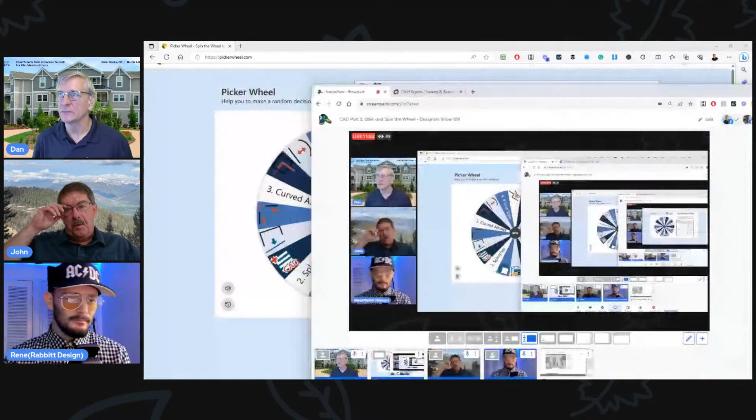We've got some fun topics on here. All right, so that's a simple one, you guys all know what that one is. That is make block. Okay, so actually we'll cover two icons, that one and this one. Oh, and I forgot to hit remove, that's okay. So let me go to Chief here.

Make block: whenever you're drawing things in Chief—lines, windows, doors, whatever—and you want to group things together, you take a bunch of lines and group them together. There's a little icon down here called make block, and that icon is used to group things together. When you do that, you get another icon when you click on it.

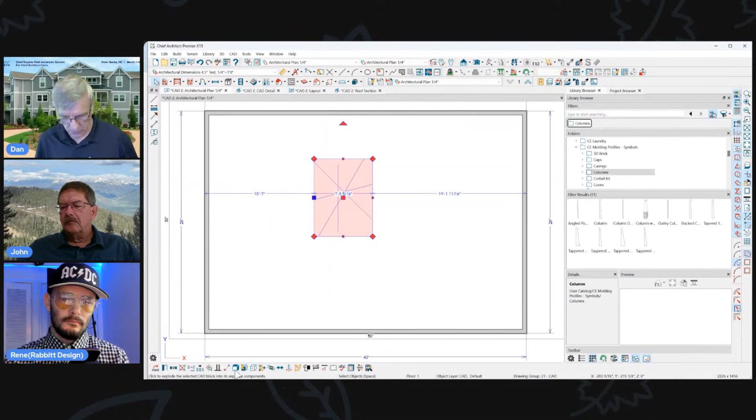That's explode block, which is also on the wheel, so if we land on that we won't do that one. That's the way you can take the block apart so it's individual items again. In its simplest sense, that's what making a group and exploding a group is—you ungroup it.

The thing about all of this is when you explode a group in Chief and go to the CAD pull-down and then CAD block management, you'll notice that even after you've exploded it, it's still in the program, still there. You can still grab that CAD block. I do that every time—I don't hit the insert button, I hit OK. So we hit insert, and now I can insert that block into my plan. Yeah, and so those blocks are always there.

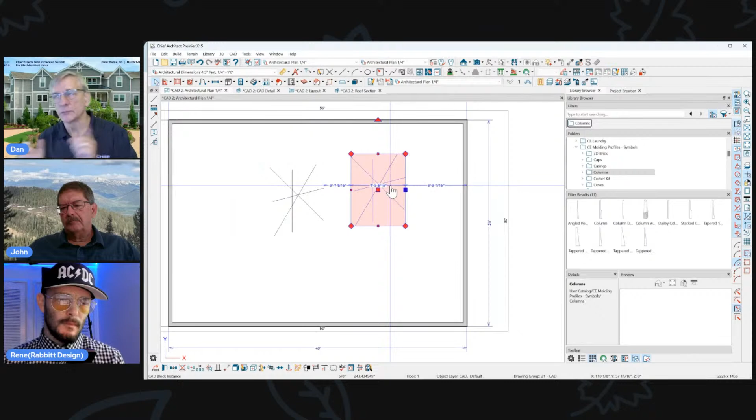There's another CAD block tool, I'll show you some other things you can do with CAD blocks once you get to it. But that's what CAD blocks are—everything that you group together is a CAD block. And you can do the same with windows and doors.

If you put a couple windows in and group select them, you see kind of the same icon, but this one looks a little different, and it's called mull. It's used to mull doors and windows, but it's the same concept where you can group and ungroup items. You could do that with just about anything in Chief Architect—I think the only things you can't really group together are walls, and notes, you can't group notes together. And you can't group windows that are in two separate walls, which makes sense.

But other than that, you could group a lot of things together in Chief. So that's the make block icon. You guys got anything else? Have you ever gone through the really convoluted process of doing a custom sink cutout for a fixture?

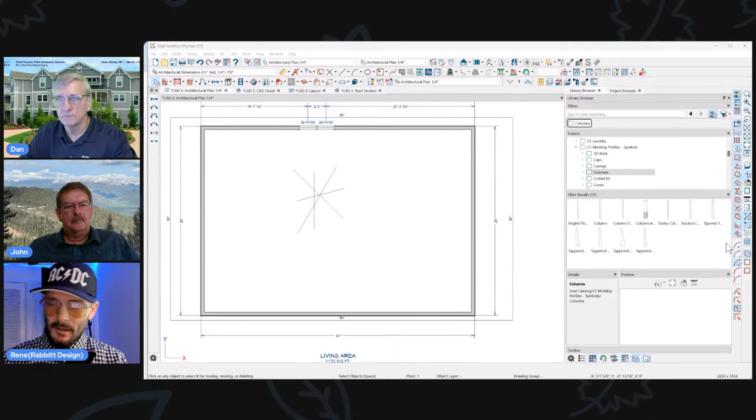I have not. You have to build out a countertop, make your hole in the countertop, and then retain the hole, and then block it with the rest of whatever your sink is in order for it to cut according to your spec. So if you're always building a sink with a faucet and you don't want it to cut around the faucet too, you have to do that process.

Okay. Yeah, different kind of grouping, but the same concept. All right, cool. Same thing where once you make the CAD block, you go back to the symbol and you go look up through your CAD blocks and you find that custom sink one that you made. Got it.

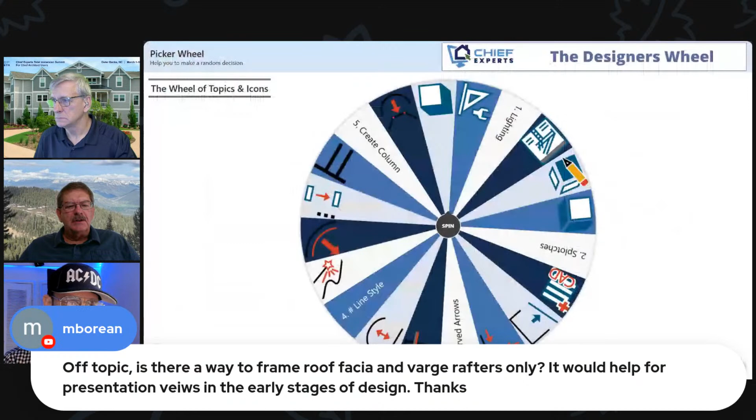Before we spin the wheel again, do you guys understand what this question's about? It's a way to frame roof fascia or barge rafters only. It would help for presentation views in early stages of design. It's a way to frame roof fascia. I don't get what you mean, frame roof fascia. You can do a backer on the fascia. That's part of the roof settings. It would help for early stages of design.

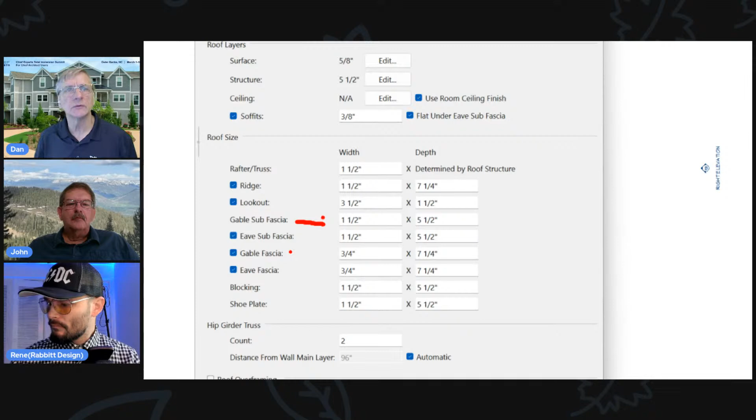I mean, when you're talking about framing, let me just build a roof here quick. When you talk about framing in a plan, it's really easy to frame your plan now and show what's there, again, for those early stages. So when you're talking about the roof setup and the structure for the roof, this is where you would set up your framing for the subfascia, and the gable subfascia, I believe. Yeah, even gable subfascia. So that's where you would set up the framing for that.

And then when you frame your plan, I'll switch to my framing setup here. There's an icon now under the framing tools to build all framing. This one right here. So you click this little icon, build all framing. That'll pop all the framing in your plan at once, and then you can look at your framing all at once. And if you've selected truss roofs, Chief will put truss roofs in your plan for you automatically. So that's pretty cool how that works too. But you'll see there's your gable fascia. I hope that's answering that question.

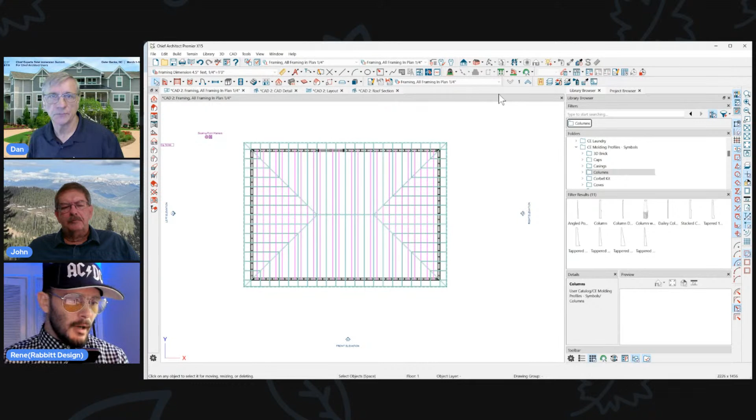And then you could delete the rafters as you needed to. Let's see, if we highlighted the rafter tool and just draw a marquee over that, you just get rafters only. So just don't delete that, and that would leave that info. Let's get back to this. So I could delete it from this view too. Just click on them and delete them. So there you go. You can see you have a lot of control over that. Okay, I hope that helps.

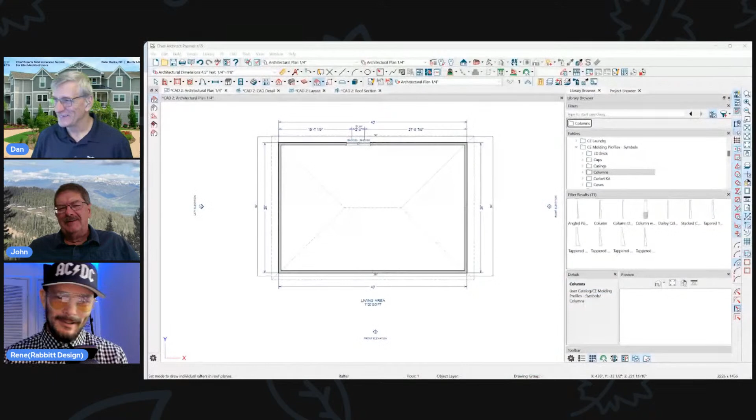All right, let's go back and spin the wheel again. Let me just do something here before I do that. Let me delete this because we already covered that. Here's a clarification of that question. I just wanted to frame the fascia only, not all the interior rafters. This would be so that the camera view looks better. Would save me the hassle of deleting all the rafters or trusses.

Just turn off your automatic framing, and then it won't frame that stuff. Also, super fast to delete all your rafters and rebuild them. Yeah, just like I showed you. Just highlight the rafter icon, draw a marquee, done. Just don't include the soffit or the fascia framing. Yeah, I just have my automatic framing turned off. I don't frame it until I'm done modeling it.

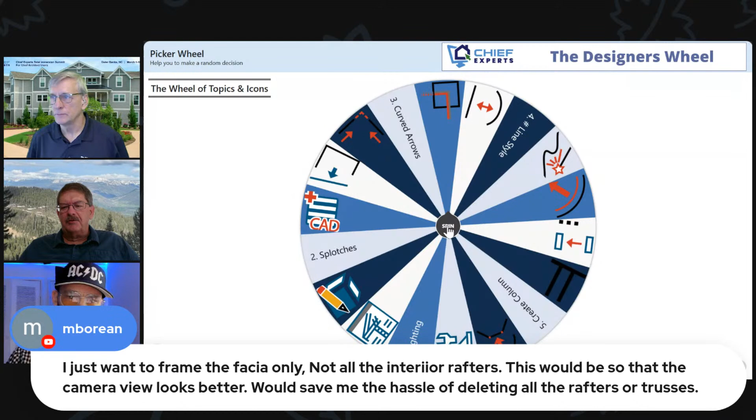And that's the cool thing about group selecting things in Chief. Almost all these icons that you see up here, if you select them and hold your shift key down and marquee select, you're only going to get those items in your marquee selection. So that's a massive time saver.

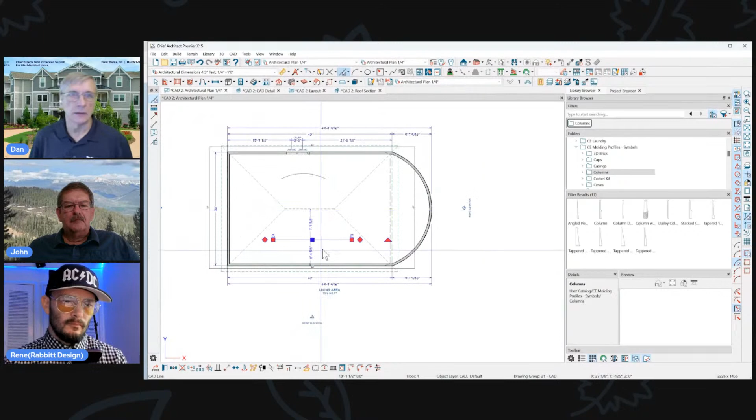Okay. If I wanted to convert this wall to an arc, to a round curved wall, I would draw the wall, make it the size I want, and then set the arc in the dialog for that wall. So it really works well. One of the things I wanted to show real quick, sometimes you want to create arrows that are curved. So a real simple way to do that is to draw a line.

Let me just close my browser here.

So we're going to draw that line. And I'm going to make a line that's kind of like that. There's a couple ways to do this, but I'm going to use the 3 key to add a break in there. Then I'm just going to hit the make line to arc, and I set up a keystroke, Shift D, because I use this a fair amount. So I just hit Shift D and I go like that, and then I go like that, and there's my curved line. And then I could take that, go to my arrows and turn arrows on both ends.

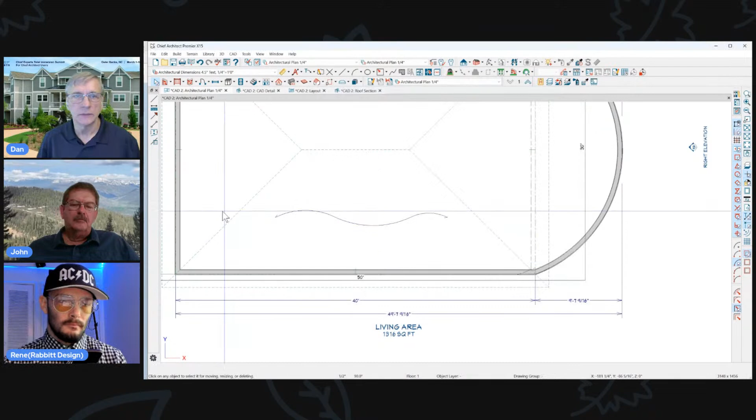And then I could make the arrows bigger, smaller, make them any kind of arrow I want. And there you go. And you can change the size of the arrowheads on that line. It works really well. Another way to do it is to draw your line. You don't need to convert line to an arc. Just grab with your right mouse button and you can bend the line. Add a break in the line, grab it, move it. So right mouse button. That's the other way to make arcs in Chief.

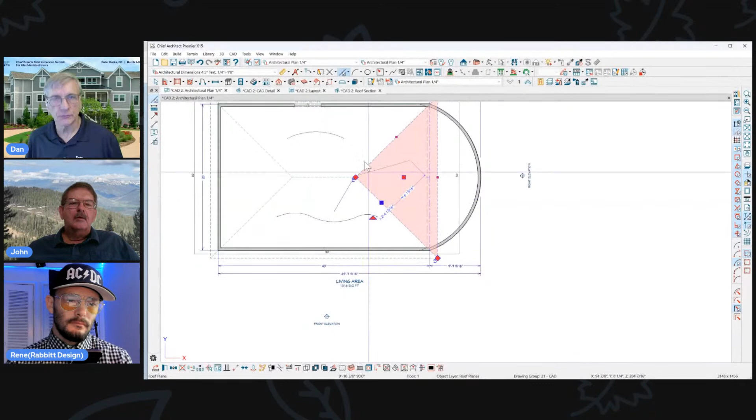And at any time, you can convert that arc back to a line by clicking on the same tool. That makes it a line. Yeah, it's not only convert line, but it's convert selected edge, right? Exactly. I can't do it to roof, so nothing for a roof. But any kind of line, you can do that. Countertops, sidewalks, roads, anything made out of a CAD polyline other than roofs.

So I find it much easier to start with CAD and then convert my CAD shape to what I want, as opposed to starting with the countertop. I'd rather start with CAD because we're not building in 3D. It's not as laggy, you know. Well, whenever I do a kitchen design in Chief, I'm laying out. I use countertops. The reason I use countertops is custom countertops.

I'll just start laying them out, hit my tab key, and I want to make that minus 25. Because I can break them, shape them, make them whatever I want really easily. And the cool thing about it is I can look at it in 3D and get a little sense of the traffic flow. So I can measure off that. And if I like it, I just leave them there and put my cabinets underneath it. So I find that to be a real simple way to start laying out kitchens, to use custom countertops rather than putting all these different cabinets in.

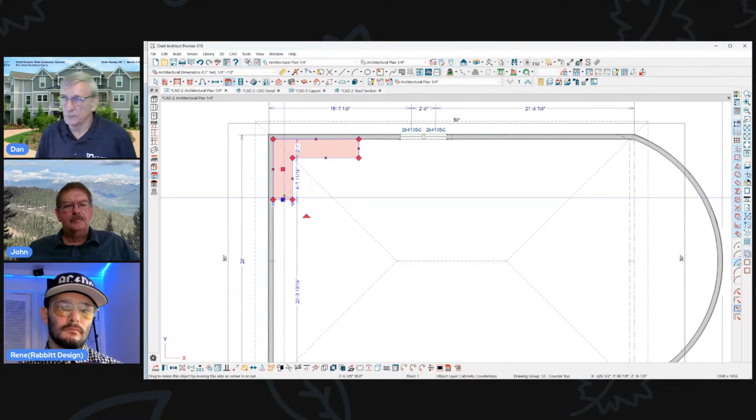Because what's the first thing you do in a kitchen when you're laying it out? You're trying to figure out a good traffic pattern. Then we start working on the appliances, you know. So Rene, you probably have libraries set up full of stoves and different kitchen variations that you just pop in and move the things around. So another nice way to do it.

I'm curious, Dan, with making the line into an arc, like with the connection things for electrical lights to switches and stuff, does it matter which direction you start the line from? Or which way the arc goes? Yep. Yes. Since you told me that once, John, how does that work again? If I go that way, go up.

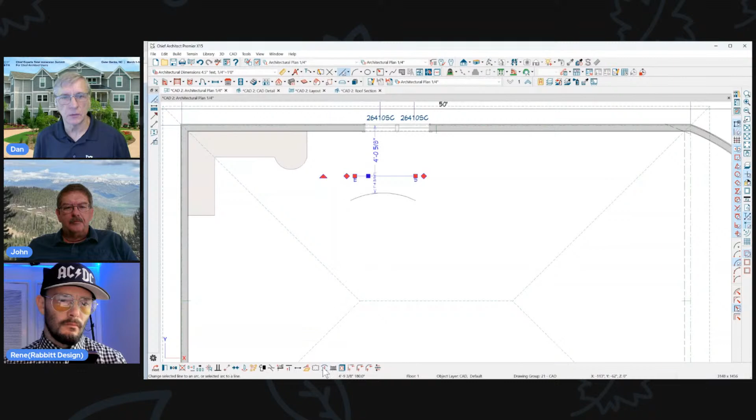When you make the arc, you pull it the other way, it'll go down. So here's my start, end. Here's my start, end. So if I convert those to arcs, you'll see that they'll go. Yep. So that's kind of handy if you can keep that in mind when you're doing stuff. Yeah. So let's see if I go this.

If I go from top down, it's going to put the arc on the right side. If I go bottom up, it's going to put the arc on the left side. Yeah, that's a good little tip. Cool. The electrical connection tool does that too, right? Yep. Oh yeah. That's how we discovered that.

Here's an interesting thing. We've never talked about anything like this: the power of the plus ABC button for changing. Yeah, that gets you quickly to being able to select a line segment and then select a dimension segment and change the leading or trailing text or suppress the dimension. Oh yeah, I use that one once in a while. I know what he's talking about.

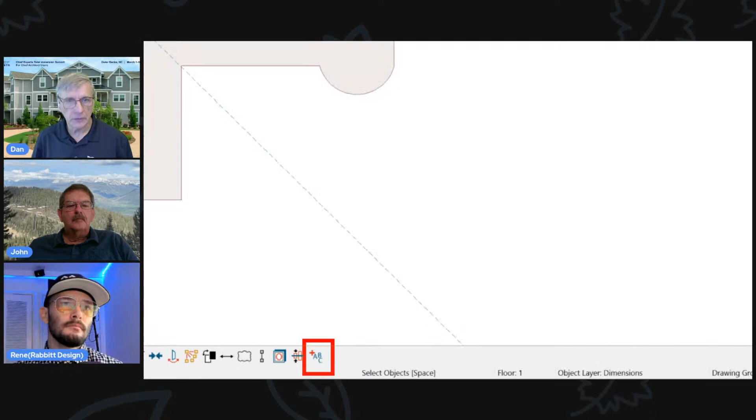So a good use for that might be if you ever dimensioned a bay window or something and you got a fraction, like a 16th of an inch, you just don't want it there. So just click on the dimension and click the plus ABC sign down here at the bottom. Okay. And then like you were saying, let's turn the auto refresh off. And now I can put text to beginning or end.

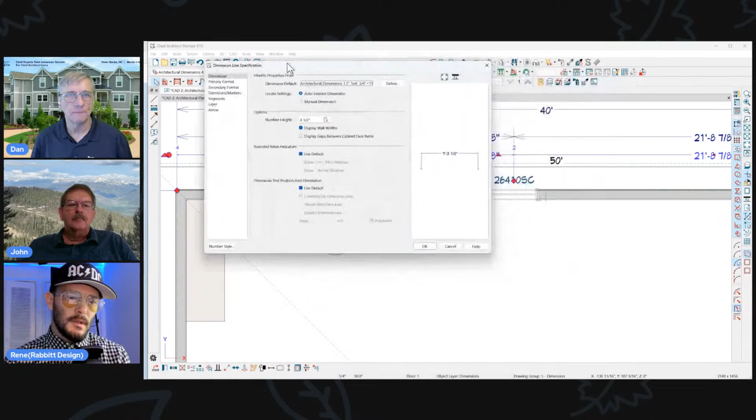Now, this is cool to do that, and then I could suppress the dimension value. So if I just want that to say 15'7" and not the eighth, I just leave one of those off, suppress the dimension. Now I've changed it to 15'7". I guess I had one on top of the automatic dimension. So that's how you can change it. And notice it's listing the segment numbers, and when you use that ABC, if you hover over a different segment, you're affecting that different segment.

Yes. And here it is in the dialog for the window. That button is called segments here. So here's where I typed that in, and here's where I hit suppress dimension value. So you can do a little bit more with it in here. Not much, but a little bit more. So that's kind of cool. And then there is another button somewhere where you can turn it all back to the original if you're done doing that and you want to get your actual dimensions back in. I forget where it's at, and I don't have my Chief open.

How can you be at a show like this without your Chief open? I don't have enough screens. Come on, John. Jeez. It's actually open, but then I'd have to lose everything else. I'm just teasing. All right, let's go back. Spin up the wheel. See what we come up with.

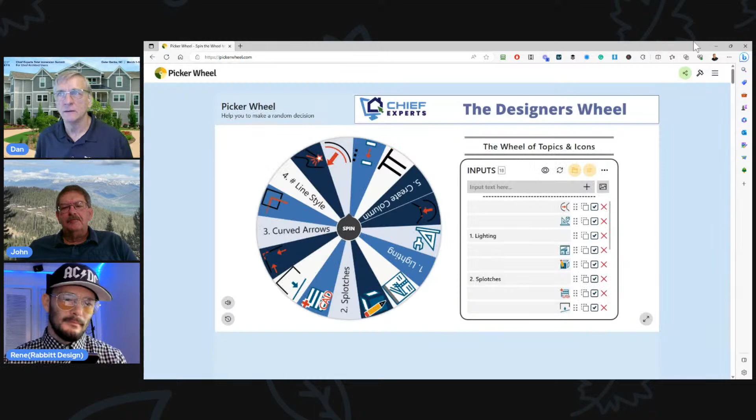All right. Concentric jump. You guys know that one, right? Oh, yeah. So what's the keystroke for concentric jump? Control Alt C or something like that. Control C. I don't know. C. I converted my C to copy because I like to use that more. Oh, yeah, I get that. Well, that overrides it then. Then you don't have concentric jump. No, that's right. I leave my C on there because I use it all the time. I convert the copy to Control C. I get you, John.

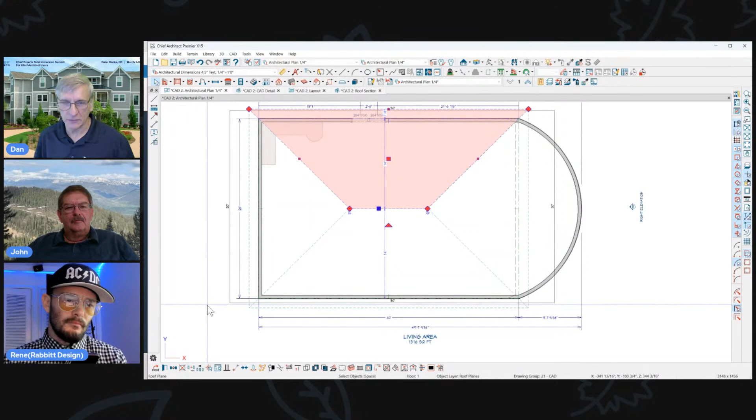We've talked about this before. Chief's copy command, when you hit Control C, doesn't work the way we want it to work to copy and paste things. We'll get to that another time. But let's talk about concentric jump. I'll show you a combination of things that you can use with concentric jump. In fact, I think this is one of the things I had on my wheel, but we'll have some fun with it. So you want to create a column with a base and a cap and a column on top of it. Let's just go create that base.

All right. So just for simplicity's sake, I'm just going to draw a slab, and I want to put a column on the end of that slab. So I'll make this 8 feet from the house. I'm going to draw a box. So I'll draw my slab. I'll click on the corner. I'll click this. I'll hit tab. I'm going to make it 24 by 24. 24 to the right, 24 up. There it is. And I'm going to take that and make that into the base of a column.

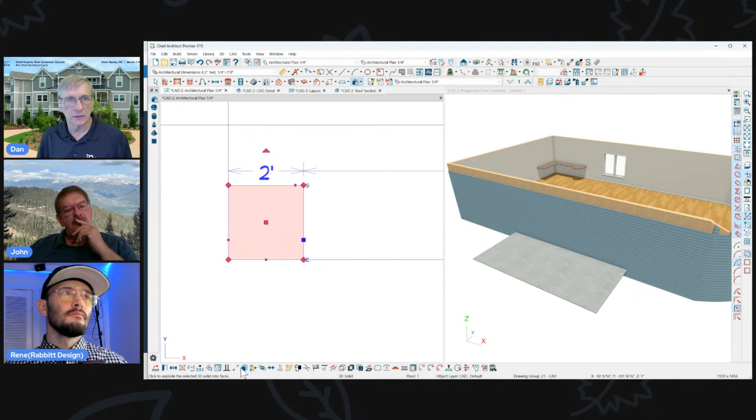And then I'll put a cap on top of it using concentric jump. So we're going to take that, open its dialog, give it a height of 34 inches, and the top of it's going to be at 34 inches. So there's that box right there. Now I want to create a little cap that goes on top of it. So here's where we're going to use concentric jump.

Concentric jump is this tool right here. We see it on the edit toolbar. It's also under the pull down menu, edit. It's up here under edit behaviors, concentric jump. And you'll see the keystrokes here are C or X1.

What is X1? What's the X1 button? I don't know. I never knew what that was. I didn't either. That'd be new info for me. A controller button, maybe? If you're using an Xbox controller. Maybe. I don't know. We'll figure that out someday.

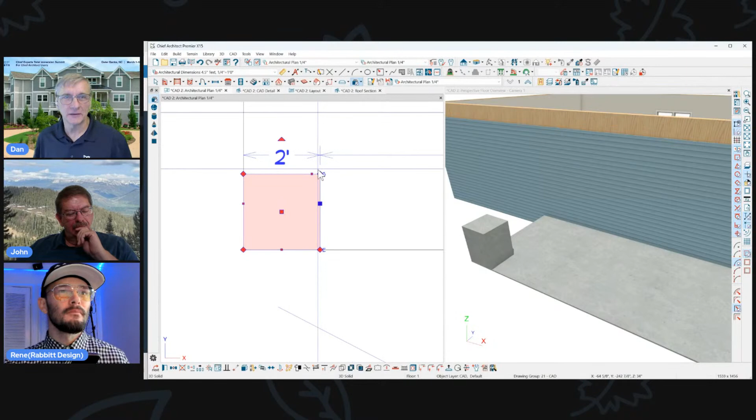But I want to make a top for this now. So here's the combination of keystrokes that you're going to use. I'm going to hit copy. Then I'm going to hit paste hold position right away. I'm going to paste that copy right where it sits right now. So now I'm working on the copy. So now I'm going to hit my C key, see how it jumps out equally on all sides?

That's your concentric jump. And then I'm going to hit tab, and I'm going to jump it out 1.5 inches. I just want a little 1.5 inch lip. You don't have to put the same number in both of these. I think whatever the one you type in first is the one that does it. And there we go. So now I've got a 1.5 inch lip that I've created. Let's just double check that.

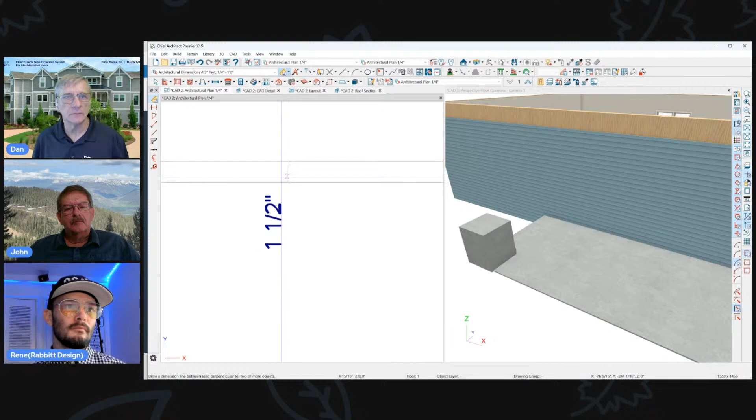Yep, there it is. And now the last thing I have to do is set the bottom. Let's make this 2 inches tall. And I'm going to set the bottom of this at 34 inches on top of that other box. And there's my lip now. So that's a simple use of concentric jump to create something like that. Really a simple, slick way to do things like that.

Let's say you put a countertop in, but you need to make it a little bigger all the way around. Just concentric jump. Again, I could click on the icon here and double click on it. There's so many uses for this. Doing your lot setbacks for your properties, doing a pool deck. I use it a lot. But let's say I want to jump that countertop out 1.5 inches. I'm going to set 1.5 as my jump amount.

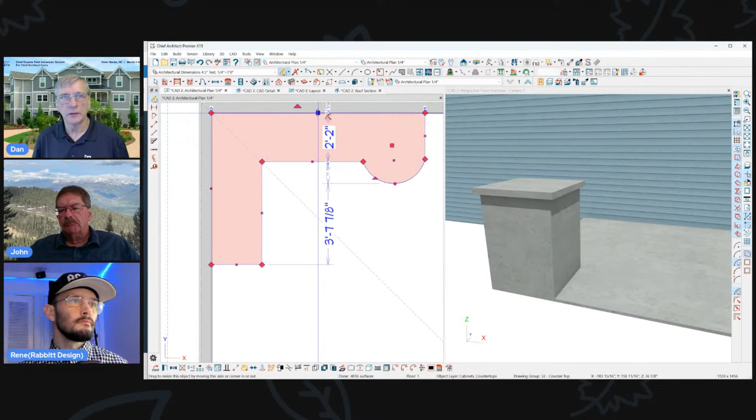And then I could just grab any piece here and see how it jumps it. You gotta watch it here. I'm getting too much. There you go. So there's 1.5 inches. Actually I can do individual edges here. So I could just jump those edges back 1.5. So concentric will stay there the whole time.

Do you guys have any uses for concentric jump? Yeah, you can do some offset stuff with it, like site offsets. For setbacks. I wrote a script outside of Chief to access the concentric jump interval that's in the preferences. Here, I'll show my screen real quick. Let's see if this works. If I swipe up, there's my concentric jump right there.

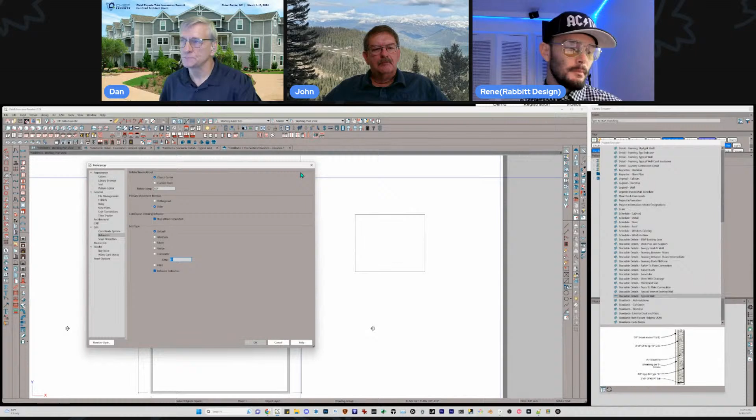So if you set this to, let's just say, 20 feet, and I grab this CAD box and I hold C, that'll give me a jump of 20 feet. Right. Same thing. I'll use it for doors and windows a lot. So I'll set this to 3 inches. That way, when I resize my doors and windows, they're in 6-inch increments when I use that C key. Yeah, there you go. So all kinds of things like that.

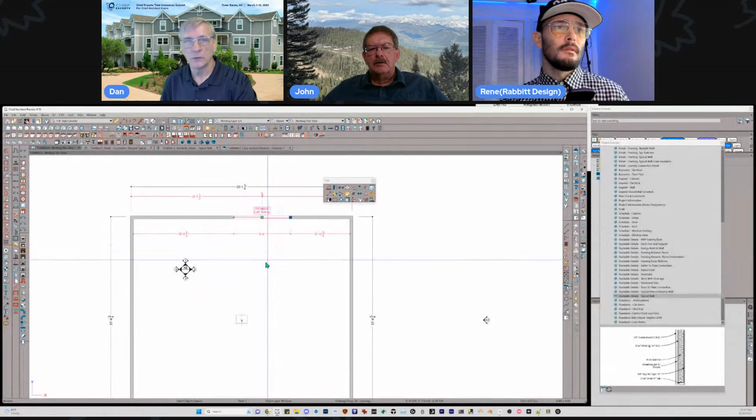Someone was just asking the other day, can we lock doors to be resizing by 2-inch intervals? Yeah. Set your concentric jump to 1 inch and then use that concentrically. Makes sense. Never thought of using it for that. Cool. We got a question. That just does the width concentrically, right? It doesn't do the height. Yeah. You'd have to be in an elevation to do the height. Right.

Or is that true? Let's see. Yeah, I'll answer this one. So question is, using temporary dimensions, they're okay for the most part. When we jump to CAD detail, the temp dimensions are huge. Well, keep in mind, CAD details may not be using your active defaults. You might have your CAD defaults set to use some other defaults. So you can always change those defaults.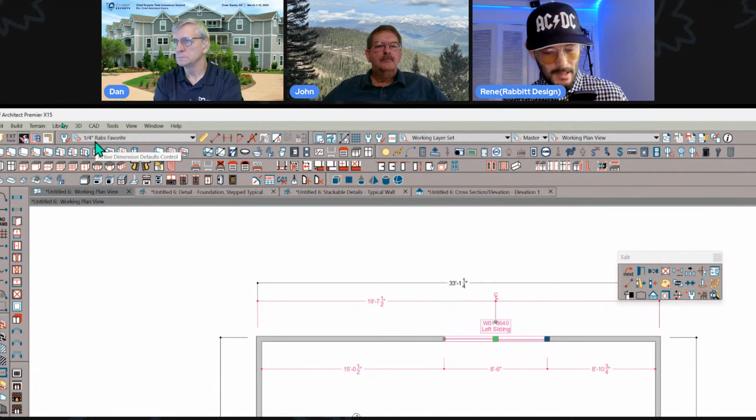But something I like to add to my toolbars, at the top of my toolbar I have my favorite, the active dimension defaults is what this tool is called. So I can very quickly on the fly switch to, say, my macro zoom dimensions. So notice when I'm zoomed in real tight here, and I'm going to draw out some kind of CAD box. If I zoom out here for a second, I'm going to draw a CAD box that's really tiny, right? So when I get in real tight, my arrows are going to be big, right? They're a little bit too big.

So I will, on the fly, switch to something that's my macro details. And now all of a sudden, those dots are a little smaller. The dimensions are a little bit easier to manage while I'm working on it. So it's easy to just drop down to a different dimension default in the view that you're in. Mm-hmm.

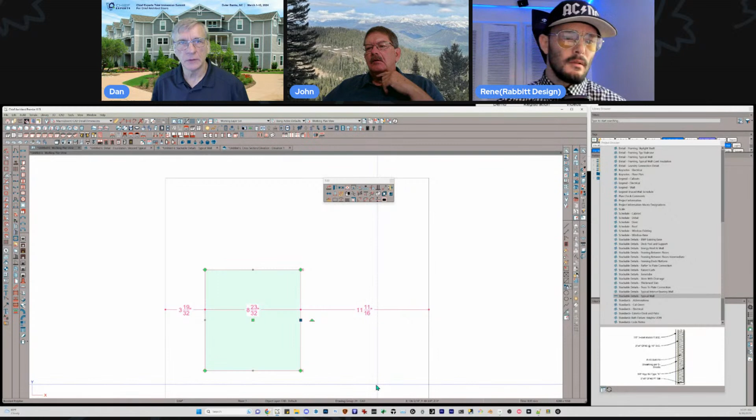Here's another way to do it. You know, a lot of times I'll draw my CAD details in a CAD detail window. That's the little CAD detail window. And same thing, I just have mine set up a little differently. Probably same difference from what you're talking about, Rene. But I have some different size texts here, 4.5. So if I have 1 to 2.25, that would be a 1/2 inch scale. So now when I do my temporary dimensions, my numbers are a lot smaller. If I switch to this, it's going to be a lot bigger. Is that right? No, they're not bigger.

Okay, so that's a setting. Is that a setting in temporary dimensions? Oh, temporary dimensions are not part of the dimension. That's something we set up in your defaults under dimensions, temporary dimensions. So here's where we're setting that. And again, they're controlled by the layer, aren't they? What controls the size of the dang temporary dimensions? Isn't it just the manual dimension size?

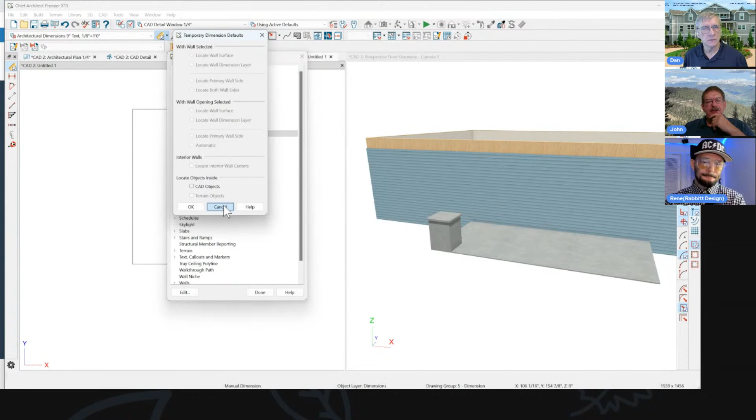Yeah, nowadays it's all in the dimension tool. So double click your manual dimensions, for instance, and that's what you're setting it from. See, but mine are not changing. So if I go do a plot, oh, there they changed. Okay, so it is part of our manual dimension settings. Okay. Yeah, so you need to switch to a different dimension size if your temporary dimensions are coming out too big. Again, when I do details too, I typically switch to my 1/2 inch plan size to do that.

All right, let's go spin the wheel. I hope that answers. I want to answer Norman James real quick here. All right, what's that? Yeah.

He's got off topic. Is there a time we can cover relink reference plans to an existing plan? I open a plan and get a message saying that a reference plan cannot be accessed. We did actually touch on this last show. We did. I wanted to just mention Chief will look in a couple places. It'll look in its local folder. So wherever your plan is, wherever your layout is, it'll look in the containing folder for any reference files.

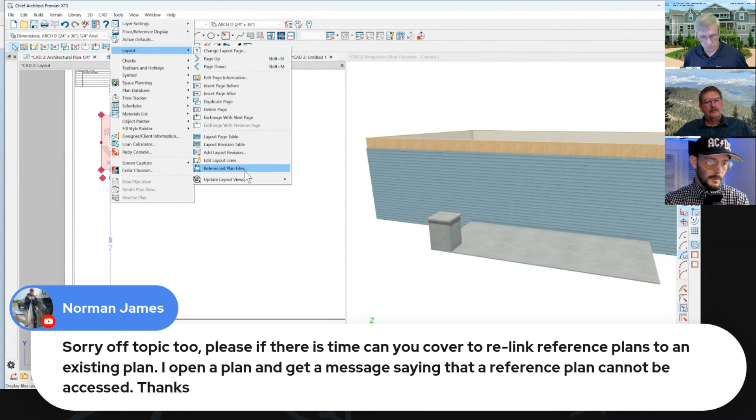So if your file convention system has it such that you're renaming your plan file, it's going to break those links. It's not going to be able to find it because it's looking for the name that you had given it before. So try not to rename your plan itself. Maybe just rename the containing folder for your next session. The other thing is when you're missing material files, Chief's going to look in a couple places. It's going to look in your My Textures folder that's at the root of all the Chief data, or it's going to look at the folder that contains that plan file.

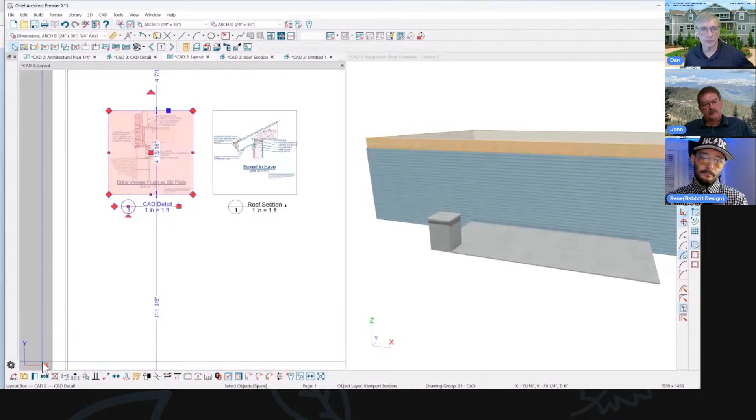So the other thing you could do, if you can still see the border for the link, which a lot of times you can't, or for the viewport, any viewport in Chief's layout pages can be linked to any plan and any camera view or floor plan or elevation that's in that plan. You simply click on the viewport, open it, and hit relink, and then go find the plan that you're working on, which would be right here.

Okay, so if it's open, it'll be on the list. If it's not open, you will have to open it by hitting open plan. And then go to, use this, what do you want to link it to? Okay, so here's all the different things you can link that viewport to. So again, any viewport, any plan, anything in that plan at any time.

It's really cool what they've done. I remember the days when anytime we'd send a 3D view, we'd have to resend it because it didn't link to anything. Nowadays, we can link to anything. So I hope that helps.

So you want to tackle this question? I've been trying to design a waterfall roof. There's no eave, but I can't get it. Can you show me what to do? I'm not sure, design a waterfall roof.

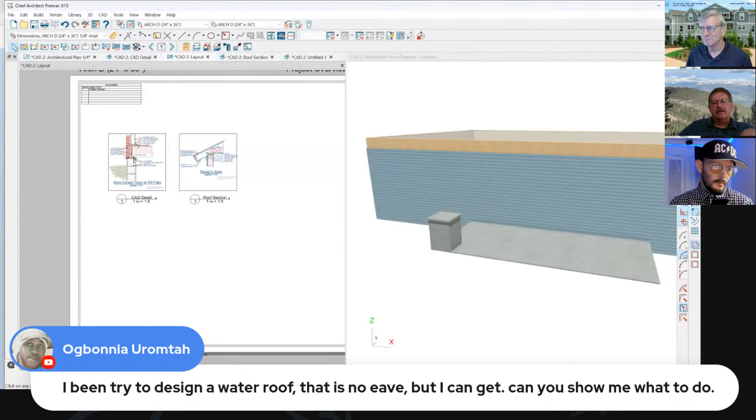That's just a really heavy slope is all you're doing there. The clarification is they said a waterfall roof later on. So it's a waterfall - I assume it comes down at an angle and then curves around so that there's shingles all the way to the soffit.

I'd say that's just a really, really heavy angle roof, and then you might need to change your rafter profile at the end for it to look good. If that's what you're describing, the shingles would come around underneath here like this - is that what you're thinking? The shingles would wrap, not all the way back to the soffit. It's just rounded on the front.

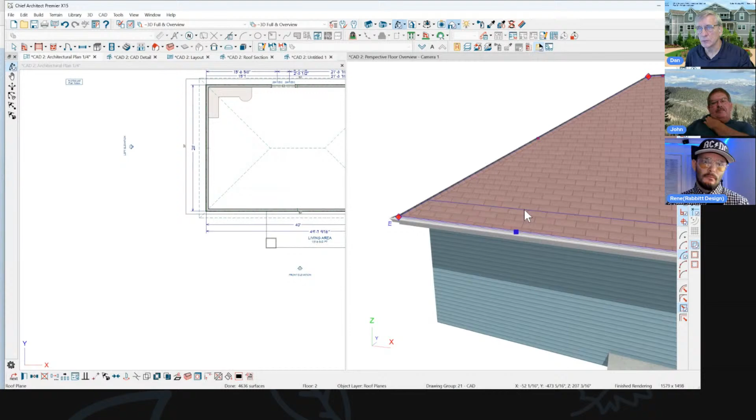They have some up about Minnetonka along the lake. Yeah, I've seen them, they're cool. Well, here, let's experiment with something since we're talking CAD stuff. We'll give it a shot, see if it works for what he's trying to do.

So if you came around like this, let's go into this view and draw what it's going to look like. Just draw a box or a line, and I'll make it fit like that, and we'll bring it under and back up. So that's the shape you want for your overhang - that's how you want the shingles to look.

Interesting. So let's just connect this, and you guys probably know where I'm going with this. Let's connect this all up. Come on, get over here. I'm not sure if this will work - actually, it should. I might have to offset it.

So I'm going to make that my fascia now, for the roof plane. So let's go to the roof. Or what, your shadow board? I could make that the whole fascia, I think, but let's just try it. I haven't done this for years.

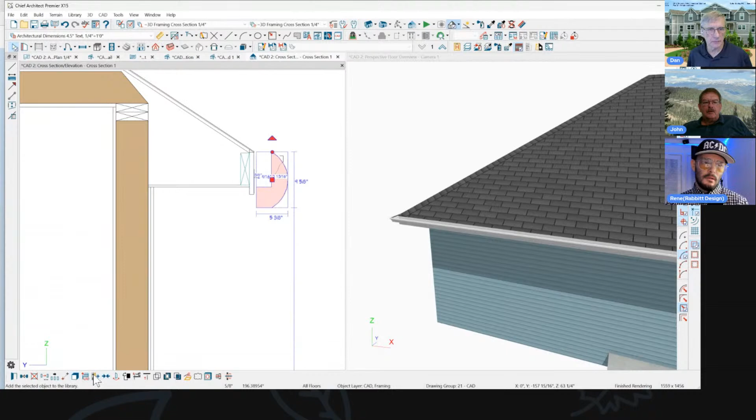I'm going to add that shape to my library - so there it is now. I'm going to click on the roof. I could set this as a default for the whole roof, or I could do it individually. Let's go to my...

Let's turn the gutter off - we got to get rid of that first of all. Let's just delete it. We've got to go to my - what would I do that as? Shadow board. I almost want to use it as your gutter instead.

Yeah, you could do that too, now that you mention it. Possibly - we'd have to play with the height. But it also needs to work on a gable end, so a gutter wouldn't work because it's not going to be able to be used on the end.

I can't use fascia because I can't put a shape in for a fascia, but I can put a shape in for a shadow board, so I can add a new shape for that. The only thing about shadow board is your sheathing will cover the whole profile.

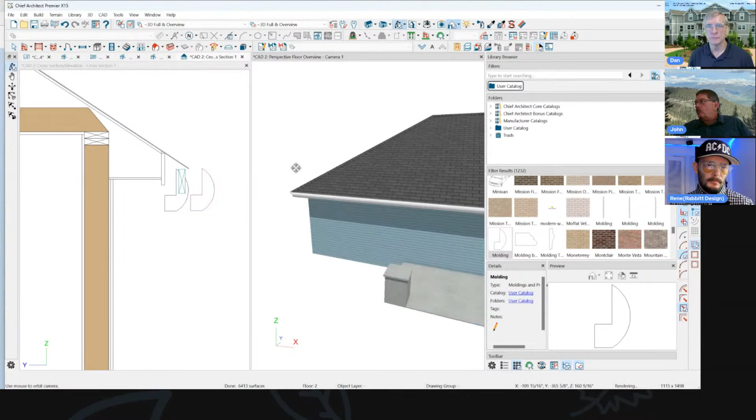Yeah, that's what I'm wondering. So go to my user catalog - where to go? Molding, there it is. So let's see where it puts it right off the chute. How far out does that extend the sheathing?

Okay, so now let's try something, and it's going to do the stupid pattern weird. I'm gonna have to - I don't know if I can. So this is a great example of just kind of explaining what the different elements do in roofs. I wonder if I could just do a curved roof that's curved that much.

You could do that, yeah. But it's good to note your shadow board, your sheathing, and your substrate, your finish, whatever that's going to be, will extend out to the full extent of the profile of your shadow board. That's just something to note in case you want to do something tricky with your stuff. And then a gutter can mount to the front side of that, but you can offset a gutter - it's not affecting the sheathing.

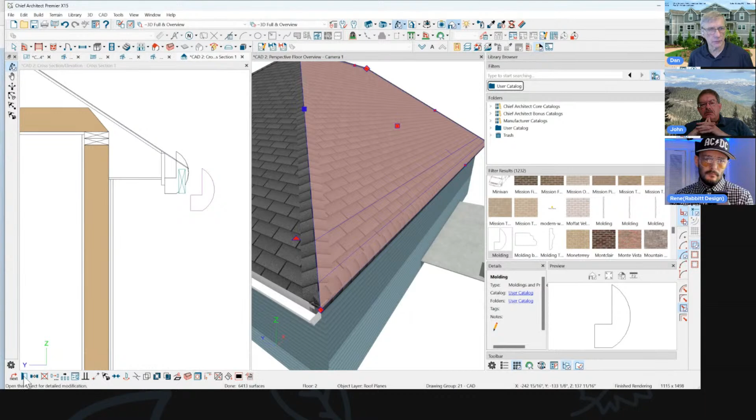Can you turn ridge caps off on certain edges, or just any edge you click on? Is there even a button there? Oh, you have to open the dialog for the roof and go to ridge cap and just turn it off, and it'll only go off on that edge that you've selected. So that's my active edge because of the dot handler. Click OK, and now no ridge cap.

So you could do it with two roof planes. Yeah, that's what I'm thinking. That might be the better way to do it, but we don't have time to do that today. Interesting concept.

Good question though. Send that one ahead of the next show, or send me that question and I'll play with it a little bit. Got a few people mentioning file convention systems. I have a system I could easily go over in a show, so maybe in another show someone mentions that. We're gonna have to start doing shows every day here, which we probably could, since we never run out of stuff to talk about.

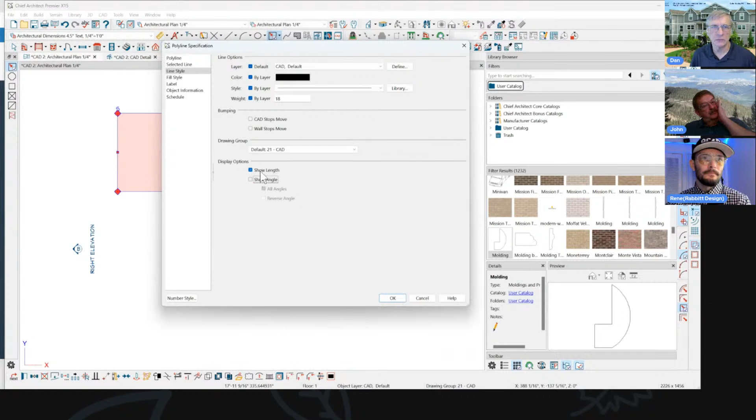Line style, the number on a line style. So have you ever done a plan where you draw a CAD box - this might be your terrain perimeter - and you want to turn on the numbers for that CAD box? Any CAD line, any CAD box, you can show the length and the angle. We're just going to show the length. How do you control that number, the size of it, and what it's displaying?

If you open the dialog for the CAD box, there's nothing in here to do that. You can just turn it on and off, but you can't change the size of it. So what you have to do is look at what layer that item is on. Then go to your default tools, go to CAD, go to general CAD defaults. There we can change what happens when I put a line on a layer - you've got all your layers available, and you can create custom layers too if you want.

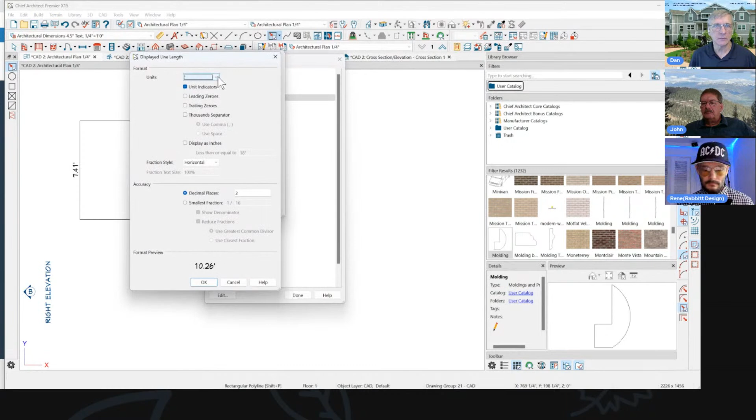For my CAD default layer, I have it set up to display decimal feet with 2 decimals. If I want to change that, I could go to define and change it - I want to show feet and inches. So I can change it to feet and inches and hit fraction, smallest fraction will be 1/16 of an inch. Now the numbers on that line will display like that. So that's a little tricky one - the only place I know of to change that is under the CAD defaults. Anybody else know where else you can change that?

No, that's how it's been for a long time, always been like that since day one. Change it to a quadrant bearing, or add the quadrant bearing on there too. Well, remember these display line angle as quadrant, so I think you need to put a north arrow in there for that to happen. Well yeah, and I have to turn that on in the line, show angles, and now it's showing the bearing. You can change the way that shows up, same place under your CAD, general CAD defaults. If I go minutes, seconds, will it change it there? Yeah, so now it's changing - it changed the way it displays that number.

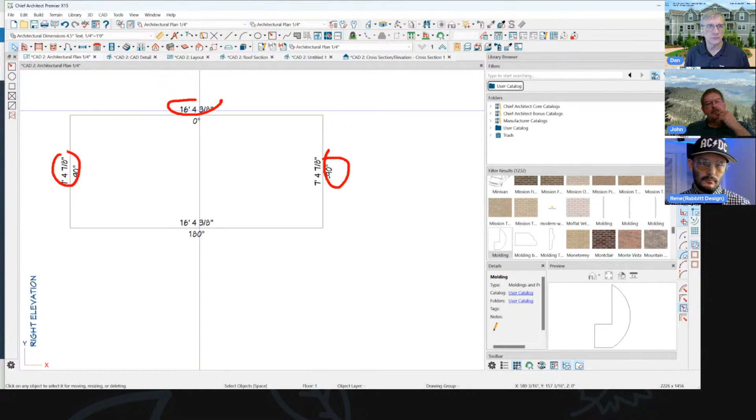The other thing that drives me nuts, and we got to talk to Chief about it, I want to be able to put all the numbers on the outside of the CAD box. So when I use this to create my numbers around the outside of the house that just display decimal feet and inches - how you see it around the house sometimes on your plot plan - I want to display decimal feet and inches. You cannot change which side of the line the numbers are on.

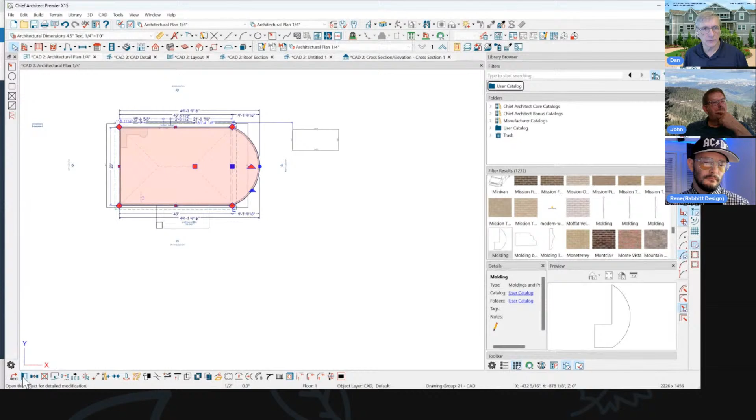So can you add a macro to the plus or minus, adding text before or after? I don't know, maybe that's a Rene question, but yeah. So if I wanted to show decimal feet around the outside of a house with a CAD box, sometimes what I'll do is create a CAD box that goes around the outside of the house, turn on the line style, turn the length on, and I just want it to show the decimal feet and inches. And you can also have your dimensions show two different ways.

Not on a CAD box, but the regular dimension. You probably can't do the direction, but you can have it show a couple different ways.

All right, let's go spin the wheel again. What the heck is this? Flying gable fascia? I haven't heard of that. What is flying gable fascia? I don't know what that is.

How do you do a flying gable fascia with an additional shadow board? You have gutters stop shy of the fascia. The gutter part shouldn't be too hard, but the fascia extends past the gutter. That I don't know, let's go look at that quick. You can stop the gutter anywhere by breaking the line of the roof edge. Yeah, I think that's the answer to the question.

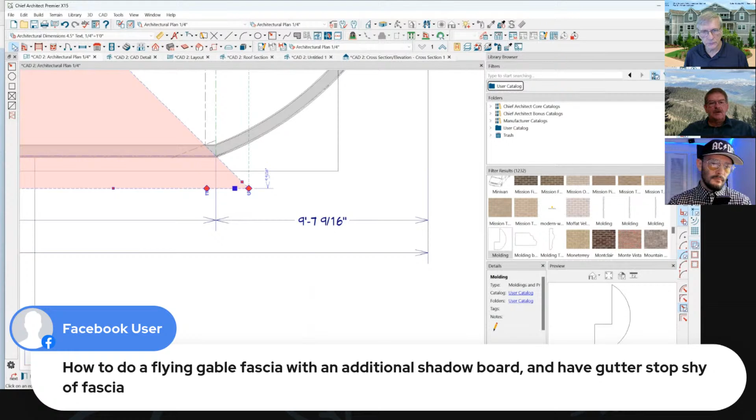So if I go here and put a break an inch from the end, I can turn the gutter off on that little piece by highlighting that line and opening it to the dialog. Here, what is this button here? I've never seen this one before. Place roof plane intersection point. Weird, why would anybody ever want to use that?

But I can go here and turn the gutter off on that piece. In fact, I can't do it there because I had that end all messed up. But let's go here, we'll break it real close to the corner, open that, and turn the gutter off.

The way you're going to have to do your gable, you're probably going to have to use a slab to get the flying fascia to come down past the end of the gutter. I can't think of any other way I'd be able to do that. So if I go look at the 3D view, they're saying they can't get the fascia to extend. I can't imagine you're going to get that to do it in Chief.

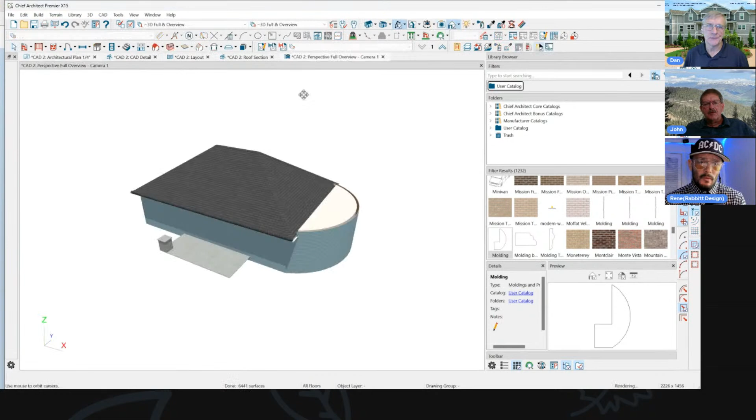Well, you could break the roof plane for just the width of the fascia and then extend it that way. Let's see how I can turn the gutter off there. So if this were a gable end and I wanted the fascia to extend down, you could try this. Let me just make that a gable, and we'll redo the roof. Build my roof planes, let's try this.

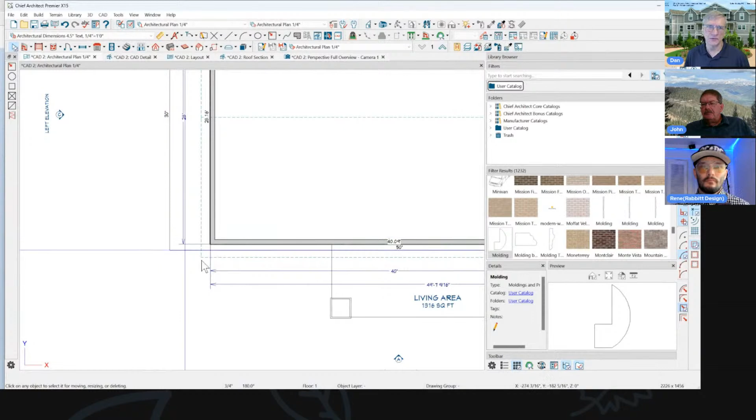Trouble is, it's going to have shingles on it if I do this. You could just break that and pull it down a little bit, but it's going to have shingles on it, I think. Yeah, it would look like that, and then your gutter would come into that.

I wonder if we could do a rafter tail shape of the gutter. I could take one of your rafters, put it out there, and extend the length of the rafter, or do a rafter tail, or just create a slab, do a cross section and create a slab. Look, I just switched to mine. This isn't proof of concept really, but we switched to standard rendering mode. I just extended the roof plane out and said no gutter. It's still showing a shadow board that I've got in my roofs, but sure, you could extend it that way, just by breaking the roof plane.

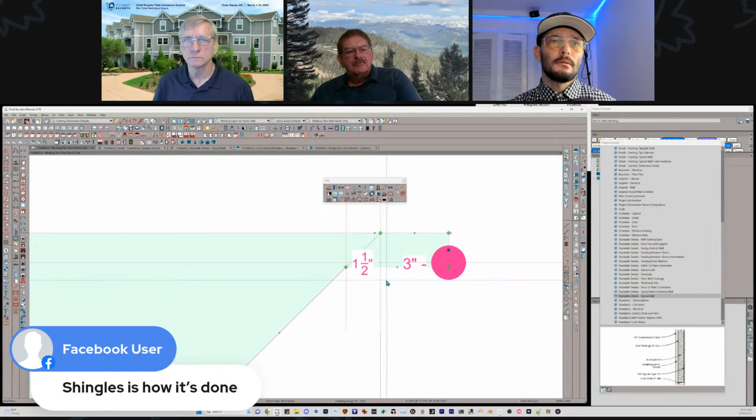Shingles is how it's done. Yeah, must be a regional thing or something. I haven't ever noticed that or anything.

All right, spin the wheel. I did that one, didn't I? Yeah, you already did that one. Spin the wheel.

All right, you're heavy in the edit tools right now. I guess so, huh. Stretch CAD, I love that one. I don't think a lot of people know that's even there.

So if you have a CAD drawing of something that you've created, let's just add some shape to this, and you look at it and need to make it bigger or smaller. This could be a whole CAD detail, it could be anything.

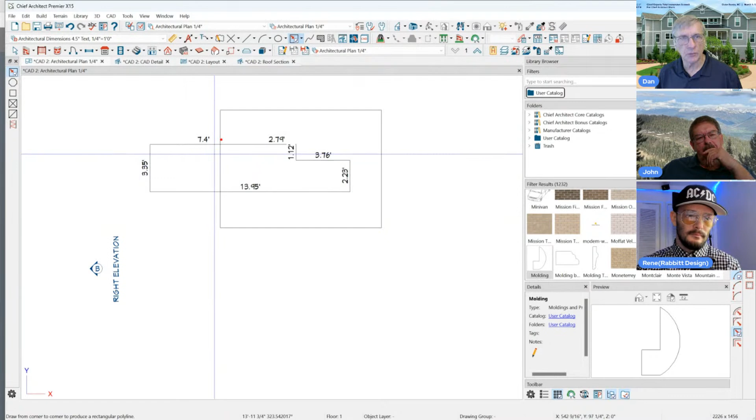One way to do it is to draw a box around what you want to move. So I want to stretch it at this point, making it 4 feet bigger that way. Just draw a box around it and go to the edit menu and hit stretch CAD. You don't have to draw a box around it first, but I find that's the best way, because then I know I'm moving that area. Then I can hit transform replicate and say move it to the right, whatever dimension you want. I'll say 4 feet, so I've stretched that whole CAD object out and moved it over 4 feet. Stretch CAD, really a nice tool in Chief Architect.

How would you handle it if you had two ends of something you wanted to keep? How could you take some out of the middle too? Let's find out. Let's say I wanted to take out 5 feet from the middle of this.

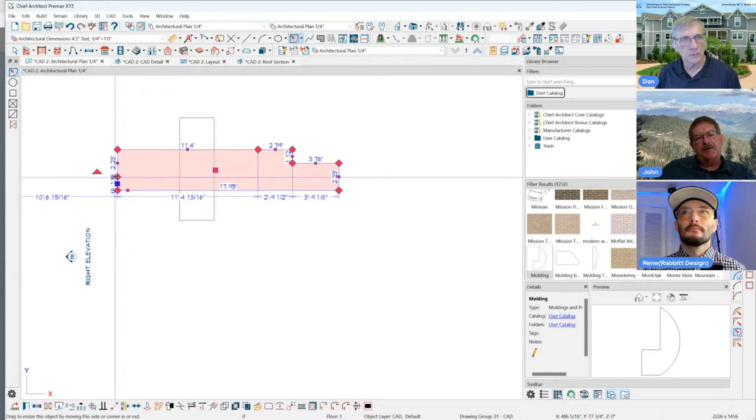Stretch CAD is used to stretch it, not to remove it. But you might be able to go ahead. Well, yeah, I would just... But you want to keep both ends. I want to keep the ends. So let's just delete that in the middle. So there. Yeah, so you'd end up drawing however much you want to make it bigger or shorter. I could just trim it out that way. Stretch CAD isn't going to do anything for that, I don't think.

You can't delete it once. You would, yeah, you just go over one end and just move that over. Move the whole thing over. Yeah, move the whole thing over, just like we did. Yep. So stretch CAD. Here I'll go the same thing, 5 feet to the right, and it's going to make it shorter and keep the end the same. So there you go. So you could do that.

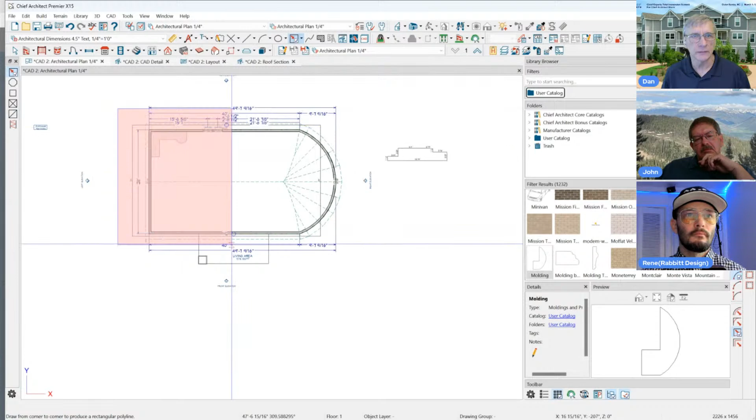And same with the buildings. There's that same stretch function for a building. I could take a building like this and say, well, I want to make the building bigger or smaller, but I don't want to move this stuff down here at the bottom. I just want to move this part of the building. And so you can make a shape of something and then go edit

area. I could do just this floor or do all the floors. And then I would just move that to wherever I want it to be bigger and smaller. And I would typically use my transform replicate to make it bigger or smaller. So that's your stretch CAD with a little caveat on how to make your 3D model bigger or smaller.

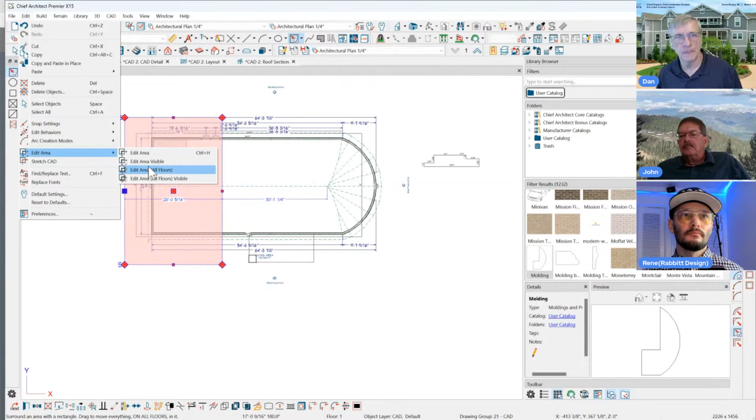Now, if you do this to your house, again, you can't just trim out. If I do that, I'm going to actually cut out that piece of the house. So what I need to do is the same way we did that CAD line, I need to move the whole end in using edit area. Edit areas for the house, for the 3D, stretch CADs for 2D items. So I could go that way and then just move that to wherever I want it to be. Great tool. I use it all the time.

All right, we're just about out of time. Let's go spin it up again.

Any questions? This is the detail that person was talking about. It's David Skog. Okay, you're showing. This is just a breaking of a gable roof and extending it out, and I still have a shadow board showing here, but that's it. Yeah, just broke the roof plane. It said no gutter, no shadow board, no anything for that extension. Yep. Oh, so you extended it out. Off the same roof where the gutter's mounted to. Yeah.

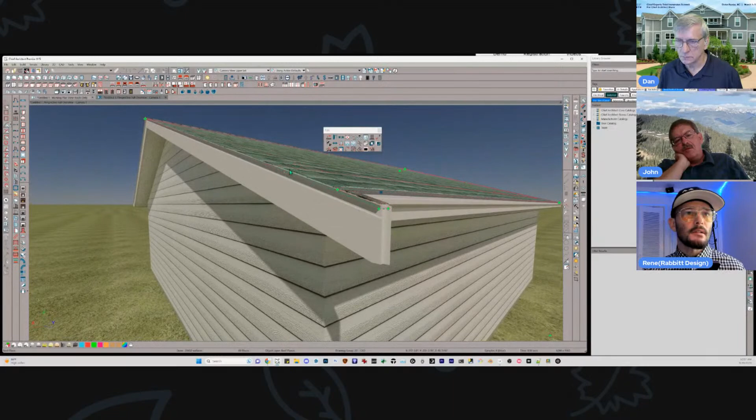But you're gonna have shingles on it if you don't want the shingles on it. They want shingles on it, I think. Yeah, you probably do. And then my shadow board is actually a drip flashing, so it does show all the way to the gable end. Just had one issue there.

Whoa, something just happened. Whee. All right, back to you. All right.

All right. The old join line button. I like that same function in the join walls. Yeah, it basically is the same thing, since walls are created with lines, where you're just joining two walls together. I should flip that over, I guess. Well, let's see what Chief does. Chief should flip that over by itself. So there's your join wall tool. And no, it didn't flip it over. It has to be a room, it has to be closed. Yep, that's right. But we can do the same thing with join lines.

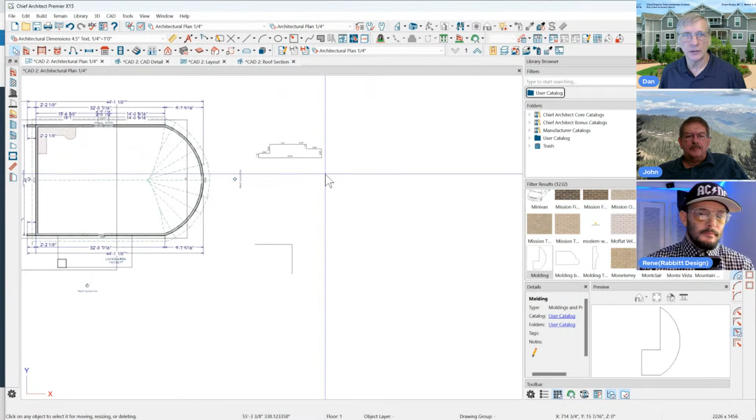Now, I've covered this before in other shows, and I just like to reiterate this one because it's such a handy tool. Whenever you have two lines and you want to join them, you could use the join line tool, and it's going to join them together. Now, that's not the only thing it does. So if you have a polyline shaped box, let me just go draw a new one. This could be any kind of a polyline box.

Well, here, I'll just draw a kitchen countertop. So I'm going to make that a different shape, and I'm going to reshape it. I'm just hitting the break key, and I've been messing with this like crazy, and I've really got it all messed up, and now I just want to start over.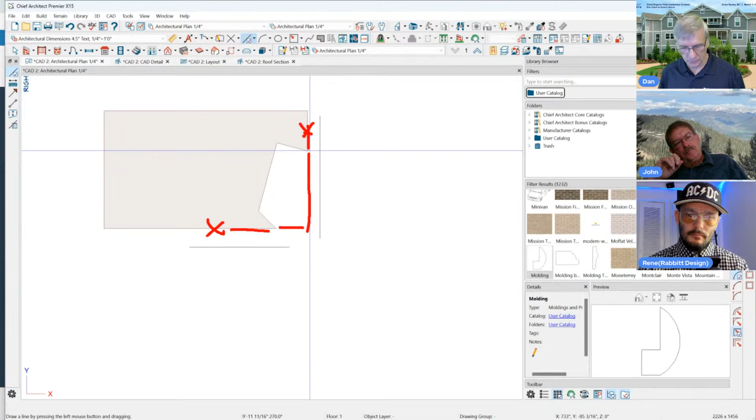So just like I did with the join line tool, just imagine you're joining two lines here. Okay, I want to join this line and this line to create that corner again. All right, so if you imagine this line and this line are going to join, you just have to ignore the stuff in between. So I'm going to click on this line. I'm going to hit the join line tool, and I'm going to click this line.

And you see the predictive move. It's showing you what it's going to do. They added that in like X14 or something, right? The visual part? Yeah. Click OK. And then if you're going to do more of this, turn it off for this session. Click OK, and then you're done. So you just straighten that edge out. Again, this is phenomenal. It works on anything.

Yeah. So even if you have something like an arc here. Oops, not that one. If I would have made this into an arc, and I've broken this, and I've got this in here, and it's kind of all messed up, and it's like, oh, I just need this line and this line to join up again. So click the line, join the line, done. Clean. So really a nice tool for doing that. Wonderful for roofs, kitchens, things like that, wherever you've drawn a bunch of stuff that you don't want to have to start totally over. So that works really well.

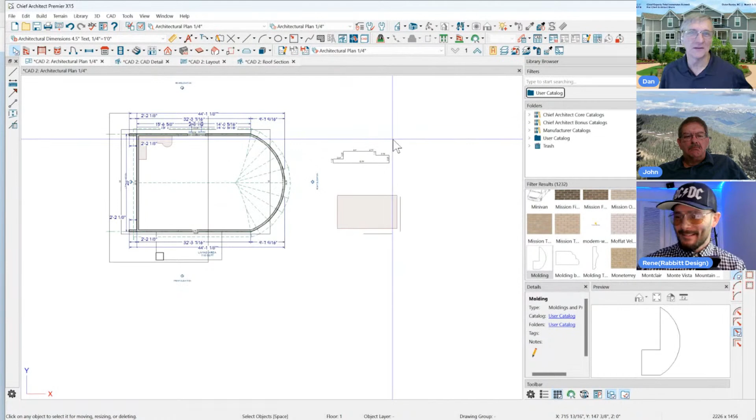All right, we got time for one more. You want to do that or answer a question? Let me do one more. Let's see if I can find a quick one to spin up to, and then we'll answer a question or two, and then we got to call it a day. All right, the make parallel tool. God, we'll have to do this next time again because I got too many things on here I didn't cover. You never know when you put these things on a wheel how many you can get done in a day. But I suppose if that's all we did was go through them, we'd get them done.

Make parallel. All right, so Chief has got that make parallel button that if you want to make a line parallel to another line, it's this button right here. So if I click on this and I click on that button and I click here, it does that. But if I wanted to make this whole box parallel to that line, and I try to use that same function, it only makes that one edge that I've selected. So Chief's got a little hidden function here, and I wish they'd add a button for this or a little indicator, because not a lot of people know about this.

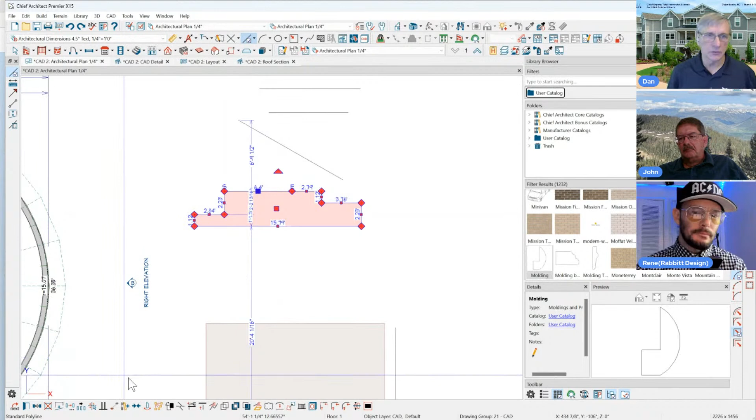If you double click on the make parallel button first before you hit it, so I'm going to take that edge and I'm going to make it parallel. That line is going to rotate the whole box by clicking that. Rotate entire polyline, click here. Now you've rotated the whole thing. So a wonderful place to use that is when you create a plan footprint and you need to rotate the house to follow one edge of the plot plan or something like that. You could rotate your whole house in your plan footprint. And that'll stay that way until you change it back or you start a new session.

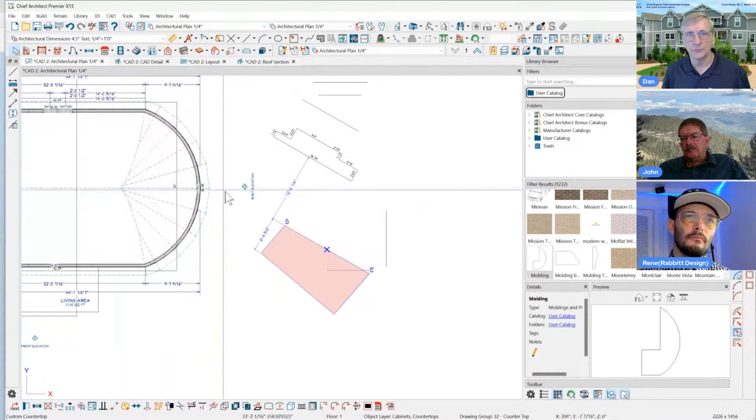Yeah. So now if I wanted to rotate just an edge and I click that, it's going to rotate the whole box yet because I haven't set it back. But if you exit Chief and come back in, then it resets. So just an FYI. All right, you got a question?

We got a couple of questions actually. How do you remove 3 rooms, first and second floor? How do you do what now? Remove 3 rooms, when you were talking about the edit. How do you remove 3 rooms, first and second floor? I mean, you're just removing walls, which then. Well, but this was during the edit tool, the edit area. So if it's just a 2-story house, you can edit all floors and just delete those rooms.

Right. Yeah. So if you had a bunch of rooms and I wanted to get rid of this middle section. Okay. So I want this to be over there. So I need to know that dimension. So I'm going to go like this and I want this wall to end up being over there. Let's get rid of that. So I've got to move this thing over. To get this wall to be over there, I've got to move it over whatever the number is here.

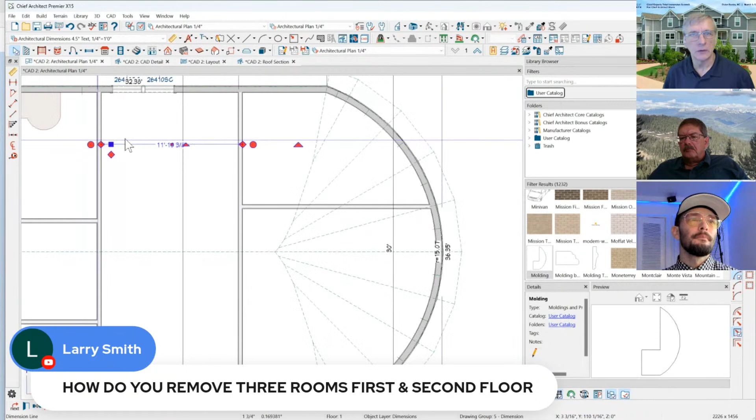Space. Come on, Chief. It's been so difficult. There we go. I guess I got to go frame to frame. You could do a surface to surface, doesn't matter. So we'll just make that 12 feet.

Okay. So I want to get rid of that whole part. I'm going to move the whole part of my house over. If I've got a second floor and I want to move that as well, or if you have a foundation you want to move as well, use all floors. So I'm going to just draw a CAD box over the area I want to move. I'm going to draw it like this. I'm going to snap it right to the framing.

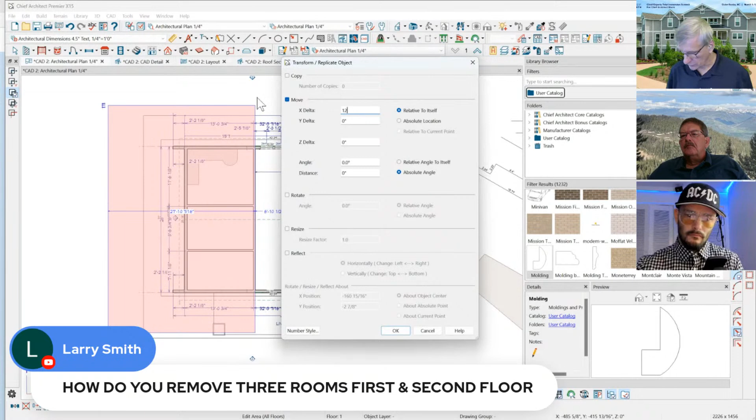And I'm going to click on Edit Area, All Floors, if I have multiple floors. Well, here I don't, but I'll still click this. So I'm going to move all floors, transform, replicate. I could just grab it and move it, or in this case, I'll just move it over 12 feet. Done. I just removed that whole section of the house on all floors. Great tool. Back up. You can also delete. You can delete. You can copy. You can do a lot. Exactly. Yeah. Good point, John.

Because I could go Edit Area, All Floors. I could hit Copy, and then I could go to another plan and paste that whole thing into another plan if I wanted to. So if you have a room addition in one plan, you want to paste it in another plan, just put a CAD box or CAD point in the same place or whatever you need to precision point to point it, and then just go copy, paste, go like this, and then I could take that and move it over here if I wanted to, or move it to another plan. So that way you could, really nice way to do it. That's an excellent tool. Yeah.

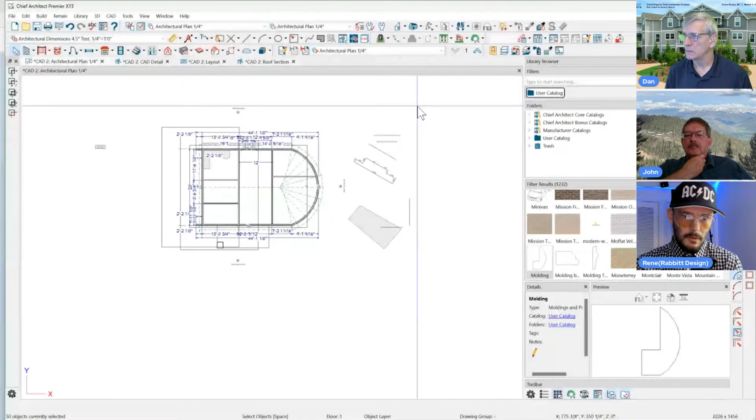Yeah, if you feel like your 3070 is slow, just make sure when you're pulling your camera views, you're updating your view. If you're using ray trace, update your view so you're capping your max samples at 50 and you set it to cap live samples. And let me just pull this real quick. Yeah, why don't you show everybody what you're talking about? Because that's really key. Even for a 3070, this setting that Rene's going to show you should make a huge difference. So if you haven't updated this since X15 added a denoiser.

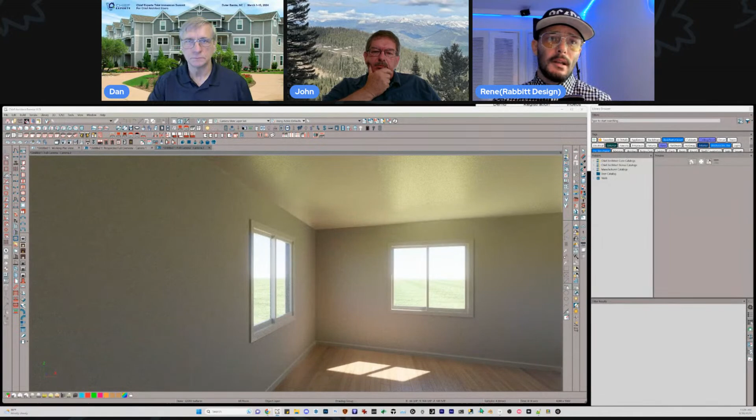So if we turn on a ray trace view, I want to edit my rendering technique options. And I want to make sure that, here we go. Here's the section. Use ray tracing, maximum export samples. By default in X15, this is set to 50. You might have yours in your template set to 1,000. No, set to 50 in X15. Is it? It was 1,000. It was 1,000 before. Okay.

Prior to X15. So once they added the denoiser, we don't need that many samples. So set this to 50. Make sure cap live samples is on and denoise when complete. And your 3070 will feel a lot faster. Yeah. I wonder, that could have just been my template that was set at 1,000. Yeah. So if it is set to 1,000, drop it way back down, and your card will be screaming.

Here's a follow-up to that. Yeah, I've reset my template to 20, but you got yours set at 4. I use 4 while I'm working, and then when I want to go export something, I'll pump it up a little bit more. Okay. And again, the way the image looks, you got to have lighting, outdoor lighting. You've got to hit your sun. You got to, materials, shadows. There's all sorts of things that go into that, which we don't have time to talk about right now.

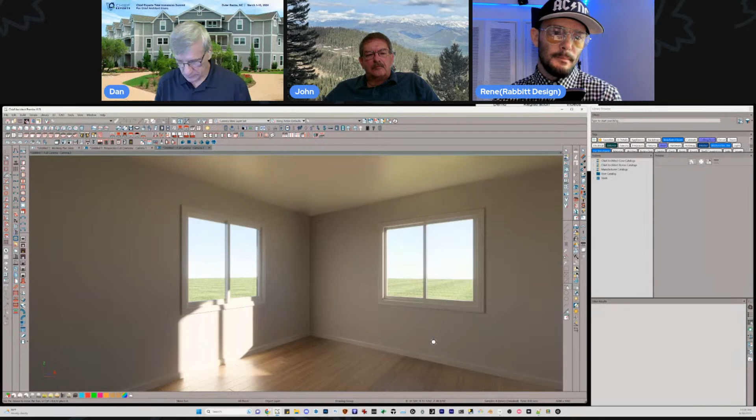His default was at 2,000. Yeah. Also, drop that way down. You'll really enjoy it. As important as that setting, make sure your video card drivers are up to date. I've found that to be massive. So go to Google, search. You want to search for GeForce Experience software. Okay. I want to show my screen.

And when you select that, I'm not showing the right screen, am I? Where am I? No. Oh, now you did it. What did I do here? Yeah, where'd you guys go? Where'd you go? All right, there we go. No, you don't have the right screen. So, now I do.

So now just search for this. This is Windows only, not Mac. Make sure it says NVIDIA, which should come up first if you search that. Just go download this software and run it. And then run it every month. And Chief will keep your video drivers up to date.

To know where you're at with your video drivers, go into Chief, go to Preferences, go to Video Card Status. So again, you go to Preferences, Video Card Status, and then it'll tell you your driver date. I'm at July 12th. Actually, I need to update this computer now. Just did my laptop the other day because there's an August update now.

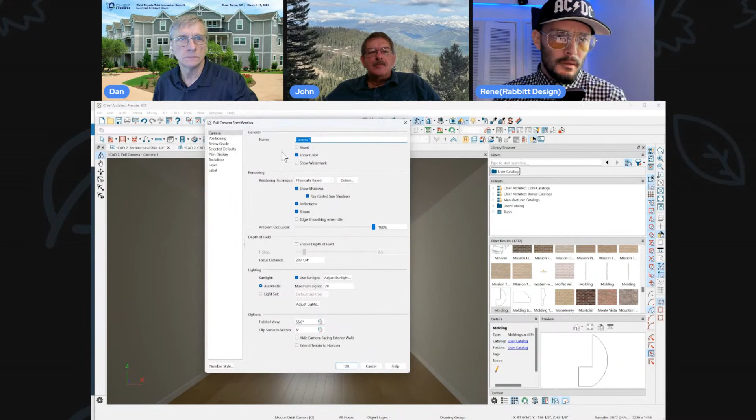So I want to mention one more thing. Will you pull up your technique options for this rendering? This one. Yeah. No, sorry. The technique options. This, which is in your rendering button there. It was 3 icons to the right. Yeah. People miss this all the time.

Cap live samples. You have it unchecked as well. Cap live samples. Okay. It will keep running. Your machine will keep running infinitely unless you have cap live samples turned on. And then denoise when complete should be checked as well. Both of these. And then just have that on by default. You set this at 4 when you're working, and you turn it up bigger then to get a better view?

I turn it up to 50 when I'm rendering something else. I'll turn it up according to the scene. So if I got a bunch of undersampled pixels, I might turn it up more. But so mine's going to go through, and then after it does 20 samples. Don't move it now. Let it do 20 samples, and then the denoise bar hit at the bottom of the screen, and now it's denoised. Great. So that looks pretty good. If they'd all look like that all the time, it'd be great.

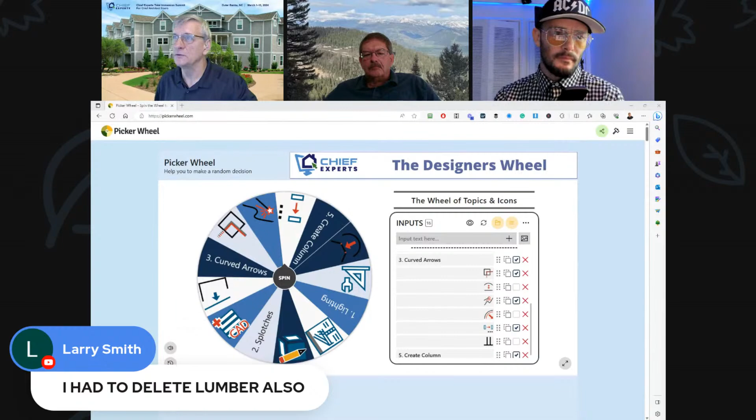I've got a 4090 with 24 gig. Works well. But yeah, I paid for that. When I built my whole new computer, I just went with everything. But it's nice. I do like it. So desktop is 3080, just got a new laptop at 4070, and there's not a lot of difference. And there shouldn't be. As long as your drivers are up to date and your settings are correct, you should be good to go.

I just want to make a comment on this. This is when we were talking about deleting those rooms. We had to delete lumber also. If you have your auto framing turned on, turn it off. Only frame it when your model is done. Because once you've framed it, the framing is separate from the model, unless you have auto framing turned on. Not only that, but every time you draw something, it's trying to build all the framing for your building, and that's slow. Don't frame stuff until you've got your model done.

Or frame it and then delete all your framing if you want to see what it looks like. I do that all the time. In the middle of a project, I'll hit the frame all button. And then I can go look at the framing and see what I've got in my plan. Now I want to get rid of it, so I go to Edit, Delete Objects, and delete all the framing. Just click this. Bam, delete everything. Now you're back to a nice clean plan.

Hang on. Go through that one more time. I wasn't showing my screen, was I? No. Thank you, John.

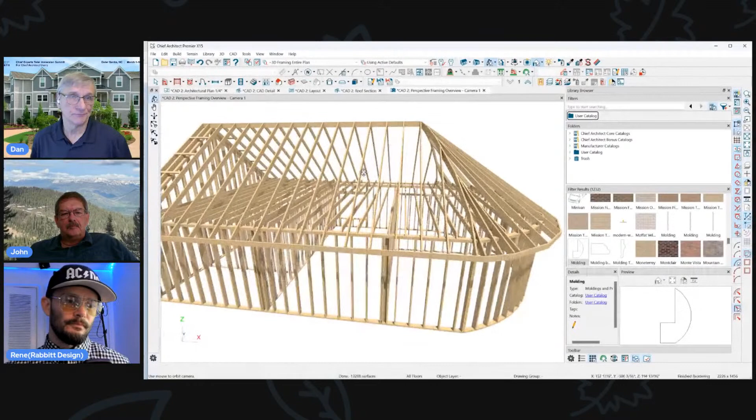At any time, you can frame your whole plan just by clicking Build All Framing. I'm going to say no to turn on the framing layers. Then I could go look at it in 3D, see what I've got. I could look at my cross sections. I tend to just leave it like that, but I don't have auto framing turned on. But if your plan's running slow, clean it up by going to Edit, Delete Objects, and delete all the framing. Hit delete, done. Want to look at it again, hit all framing. So that's pretty simple.